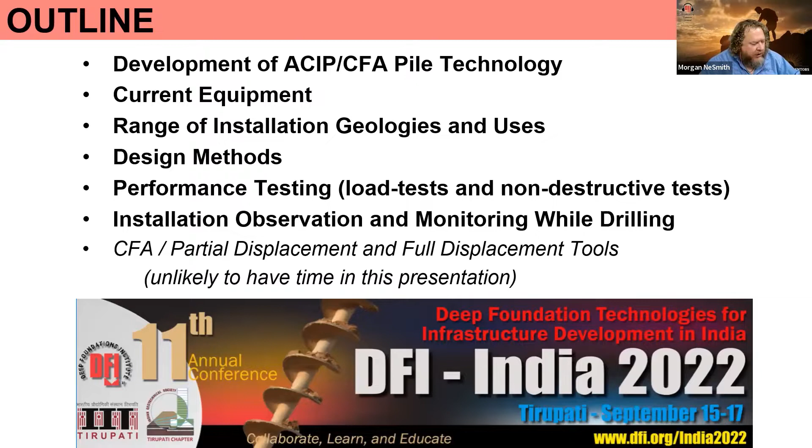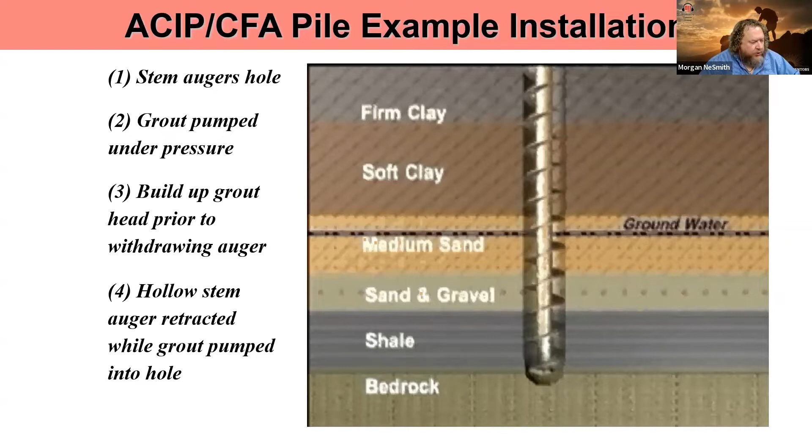So the basics of either the auger cast or CFA pile: we have a stem that has a fully flighted auger, and it augers the hole, creating a hole and excavating that soil to the ground surface. Grout or concrete is then pumped, usually under pressure, to the bottom of the hole through the hollow stem of the auger, and a head of grout or concrete is built up. We continue placing that concrete or grout as we withdraw the tool from the hole, leaving the concrete or grout pile.

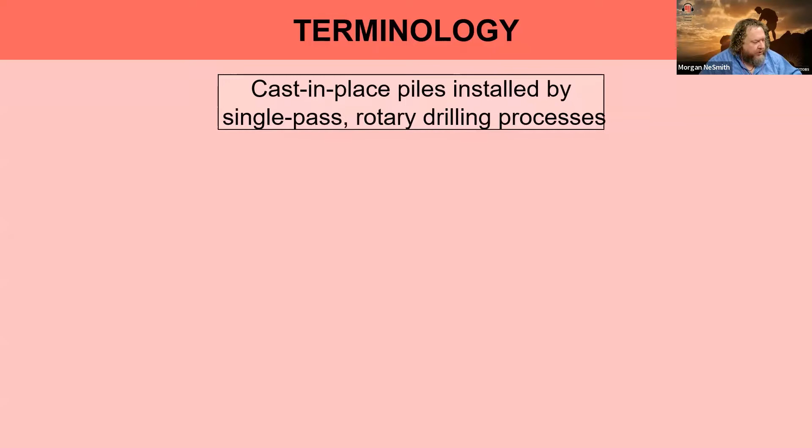So the terminology we talked about, all of these are cast in place piles. They're also all what we call single pass systems. That means we drill down one time and withdraw the tool one time. That's a little bit different from, say, a drilled shaft or a caisson, where you may auger a bit of the hole, take out the material, put some casing in, and continue on, having to auger and withdraw the tool multiple times. These are all also rotary processes, so we're rotating a tool into the ground.

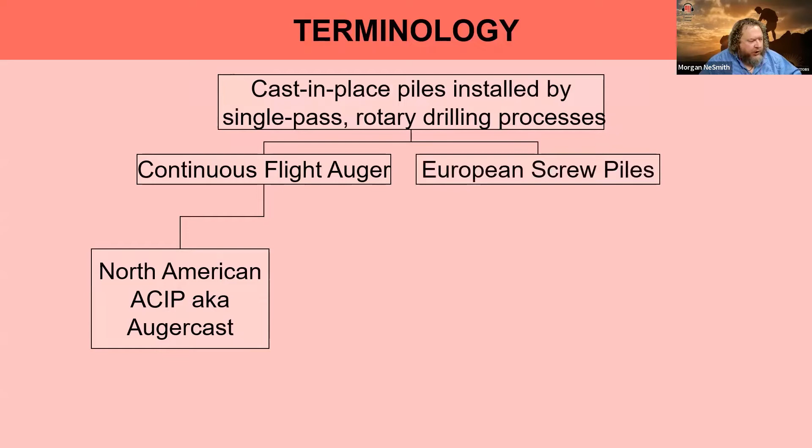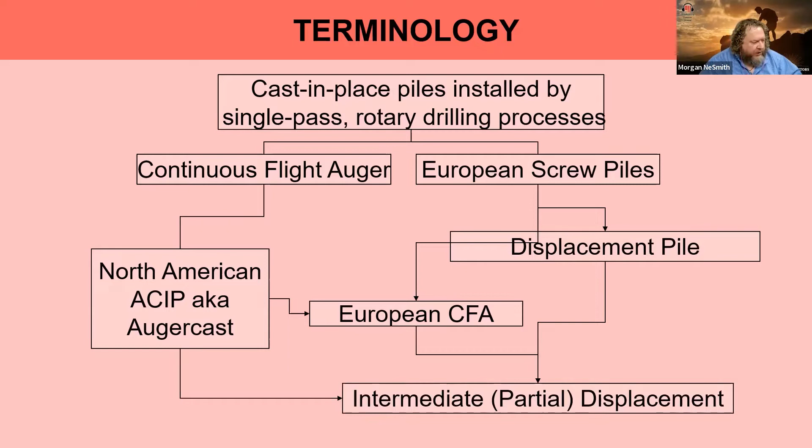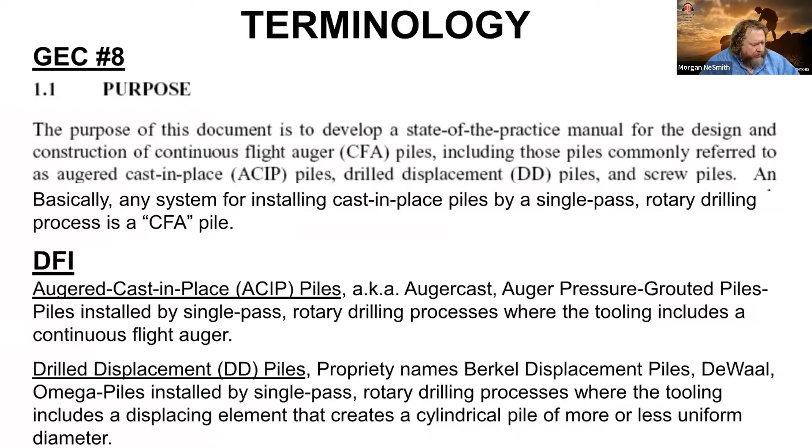We do use the term CFA because both of these tools use a continuous flight auger. In North America, we generally have called these piles auger cast in place or auger cast. When they were developed in Europe, they were using some different types of piles, with hydraulic rigs that I think you're probably more familiar with in India. When they adopted that continuous flight auger technology, especially in the United Kingdom, they referred to these piles as CFA. That's kind of where the two terminologies developed from, in the 1950s and 1960s. There are a couple of other related types of piles, but we're not going to get into those today. From North America, at least within DFI in the industry, we generally refer to these as augered cast in place piles, but we also use the term CFA. I'll talk a little bit about when we use the two different terms.

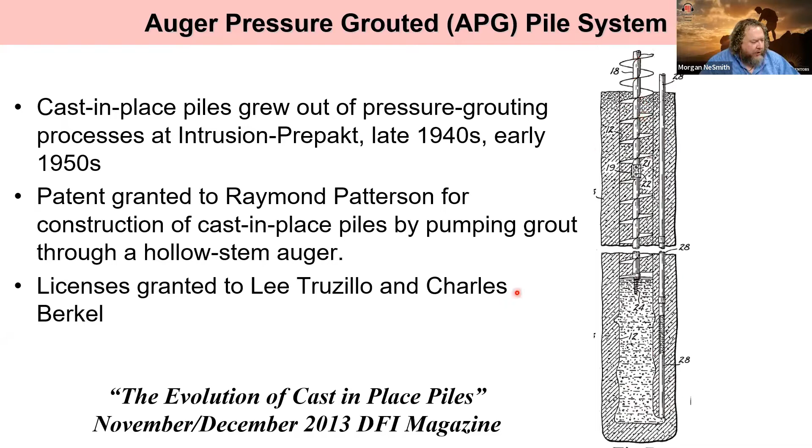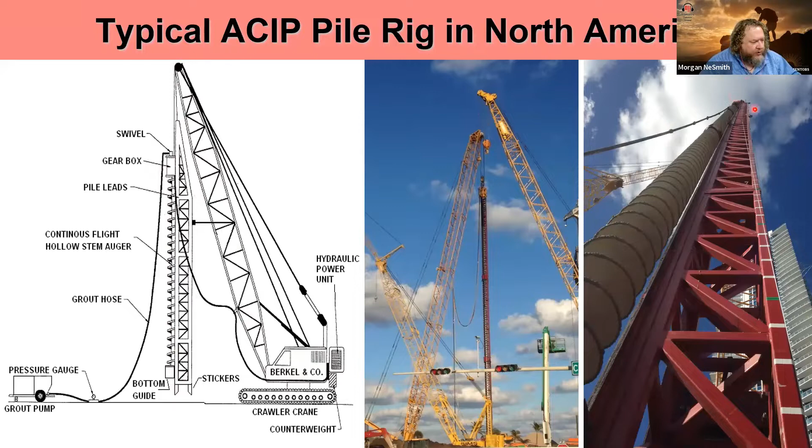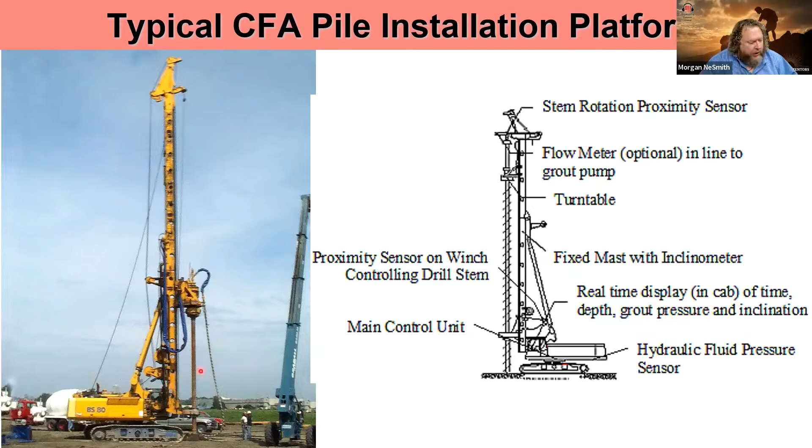What we started calling CFA, or what the UK has always referred to as CFA, is the same technology, but installed with what we call a fixed mast or hydraulic rig. These are dedicated drilling rigs, and you can use them for different pile types, but they're very common for CFA piles. Here, instead of the mast being suspended from a crane, it's rigidly attached to the body of the installation platform, and the rotary gearbox travels up and down the mast similarly. So they're very similar processes, but it's a difference in installation platform, where we use the term CFA for these hydraulic dedicated drilling rigs, and we use the term auger cast pile, or ACIP pile, for the crane supported systems.

One of the flexibilities is you can design these augers with a range of angles and distances between auger flights. So generally there's about 75 or 76 millimeters inside diameter. That increases a lot of times with large diameter CFA piles to allow more grout or concrete to be placed, depending on the size of the pile. Overall, auger diameters for the crane mounted systems range from relatively small, about 300 millimeters, up to over 1200 millimeters. There is at least a rig or piece of equipment claiming they can go up to 1500 millimeters diameter for CFA. But as far as I know, in North America, we've only installed up to 1220 millimeters, even with CFA, so roughly about 4 feet is our limit.

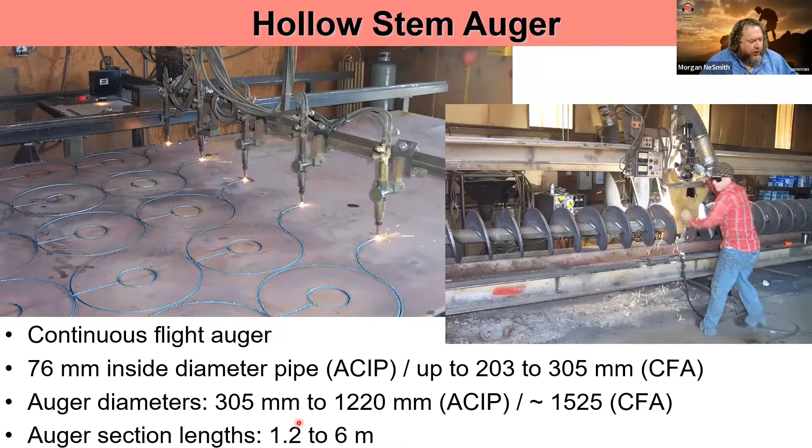We also can have a range of auger section lengths depending on how deep you're drilling. If you're drilling in areas with limited access, you can use shorter section lengths, but you can also use longer section lengths to drill very deep depths.

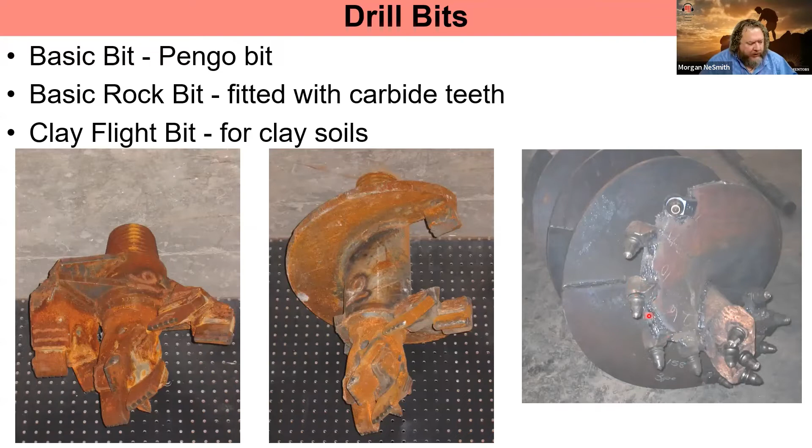We have a range of drill bits that we can apply. We have our very basic bit here, and then a basic rock bit, which has teeth, as opposed to scoopers for basic sandy soils. We also have clay bits for clayey soils to help excavate those as well. You can see the difference between the flat blade and the pointed teeth, which we generally use for sedimentary rocks, shale, claystone, sandstone. Anything harder than that, like limestone or granite, we're not going to be able to penetrate typically, even with these rock bits.

For the crane mounted system, again, we have a set of swinging leads supported from the crane, and we have to resist the torque generated by the rotation of the tool at the top. That's either done with a torque arm from the swinging leads back to the boom of the crane, or, very often these days for safety reasons, to the body of the crane, so that we're not structurally doing anything with the boom. With the fixed mast platforms, you generally don't need that, because all of the resistance is provided by the rigid attachment of the rotating tool to the body of the drilling platform.

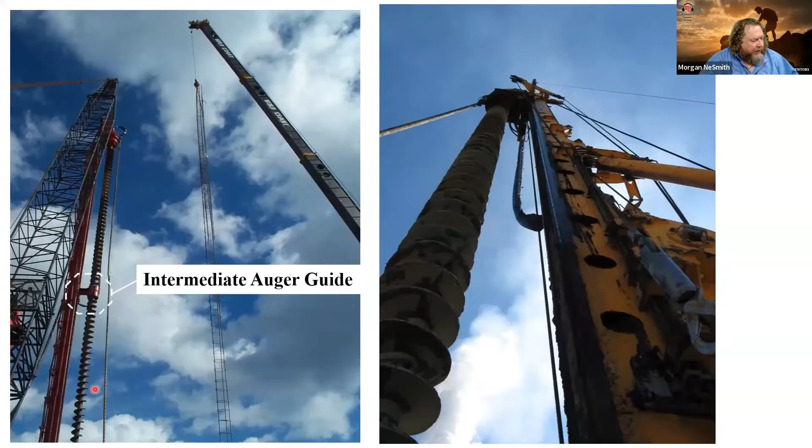As we drill longer and longer lengths, we can have a problem with bending or buckling of slender tools if the auger is too long. So we use intermediate auger guides, generally anything over about 13 to 15 meters in length.

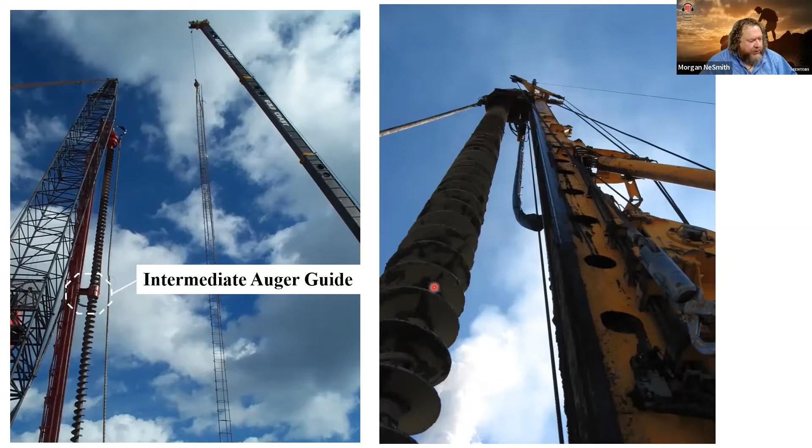When we're drilling any deeper than that, we'll generally start to use one or more auger guides. We often don't use those with the CFA rigs because they are rigidly attached and have slightly stiffer tools due to the higher torque provided by these rigs, with less chance for buckling.

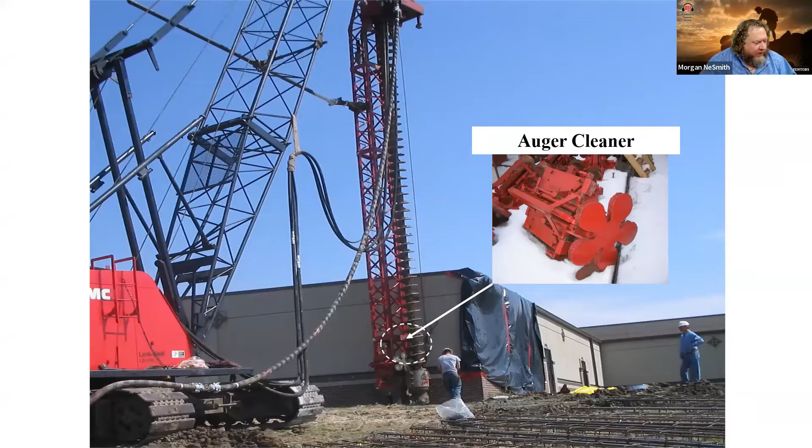One of the safety features we always try to incorporate is an auger cleaner, for either CFA or auger cast systems. That's to clean the soil off the auger flights as the tool comes out of the ground. We don't want that to fly up and fall, potentially hurting someone. It sounds funny, it's just soil, but falling from a relatively high distance it can do some damage if it hits you. So we try to prevent that by cleaning the soils off the auger flights as we withdraw them.

Our gearboxes are fairly similar whether rigidly attached to the CFA rig or to the swinging leads for the auger cast pile. Those are all hydraulically operated typically, and that's what travels up and down the leads. The tool itself isn't actually attached to the leads, it's attached to this gearbox, and the gearbox is what travels up and down the leads.

Torques generally range from relatively low for small diameter piles to, now, relatively high torques that let us use larger diameters, where we're starting to see these piles replace smaller drilled shafts in a lot of North America.

For crowd, that's the downward force we're able to put on the tooling itself. For crane mounted systems, that's the weight of the tool—the weight of the gearbox and the auger—which can be anywhere from about 10 to 45 kilonewtons, depending on the size and diameter of the tool.

With the CFA rigs, because they're rigidly attached, we have additional crowd force that can be applied directly from the machine to the tooling, besides just the weight of the tooling.

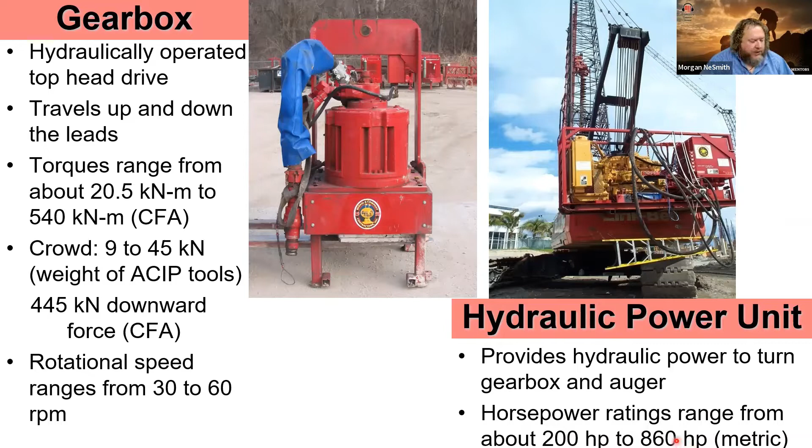With either system, we generally use grout or concrete, delivered either batched on site or, most often in North America, delivered by a ready mix concrete truck, batched at a plant and delivered to the site.

It's poured into the hopper here, and this is a hydraulically operated pump that pumps under pressure at about 2400 kPa at the outlet.

Now, I do want to say that we're not really pressure grouting with this system. This high pressure we're generating is really to overcome these very long grout hoses. We pump the grout or concrete for long distances, and then to get it up to the top of the tooling to go down the hollow stem, we need a lot of pressure. So I don't want to cause confusion and say these piles are pumped under pressure when they're in the ground, but we do pump them under high pressures to move them over very long distances to wherever the crane may be.

What that allows us to do is keep this pump in one place that's very accessible for the trucks bringing grout to the site, and then move the rig around without having to relocate this grout pump whenever we change piles.

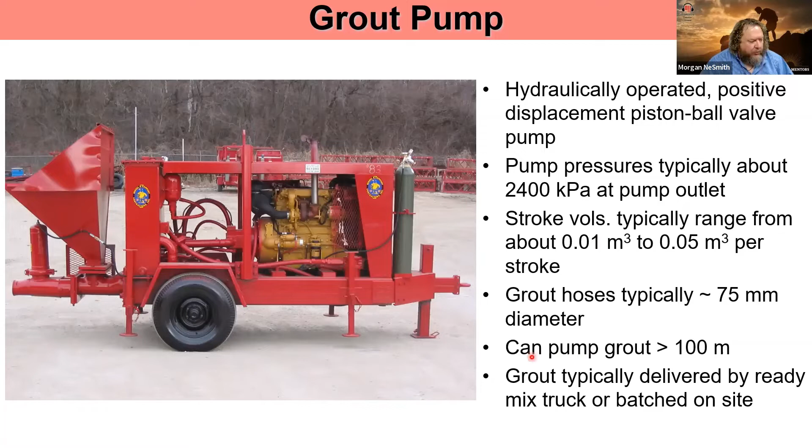This has been a developing technology in the US for about 50, actually 60 years. I'd say it's relatively mature across most of the country, and we have some major facilities supported on AugerCast or CFA piles here in the US.

I happen to live in Atlanta, Georgia, and the world's busiest airport is here - Hartsfield International. You can see the AugerCast piles supporting one of the columns in Concourse E, which was the old international concourse at this airport.

A stadium that was built in 2017 here in Atlanta is also supported on AugerCast piles, ranging from about 12 to 13 meters deep on the north side of the site to well over 30 meters deep on the south. They were all drilled down to bedrock refusal, and that bedrock sloped from about 13 to 30 meters from north to south.

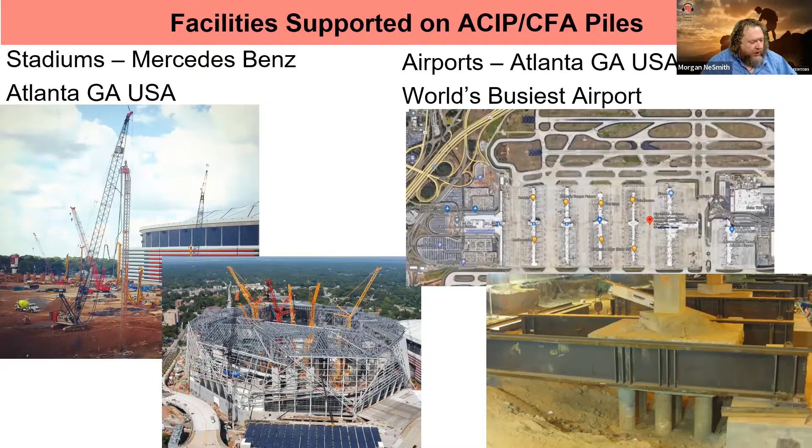That's one of the advantages of the system - we can tailor the length of the pile to meet variable conditions on the job site relatively easily. We can also put in very long piles.

This was with a crane mounted system, and these piles were probably about 40 to 45 meters deep. They were relatively large diameter piles that replaced the original drilled shafts intended for the project - this is one of the longer piles that's been installed in the United States.

That's something we can do with crane mounted systems. One of the things with hydraulic rig systems - even the largest drill rigs available - is they have a somewhat more limited stroke, about 40 meters total drill length.

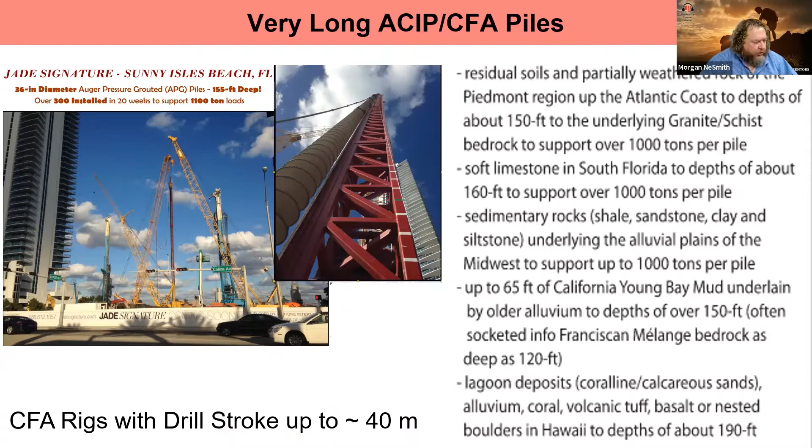As far as the range of geologies, one of the great things about the system is it's very flexible in terms of the geologies we can put these piles in. This is a project in the northeastern United States, right next to a river, where we see a sandy crust in the upper 3 meters or so, then about 15 meters of very soft alluvial deposits, and a little bit of sand overlying the underlying bedrock.

We installed AugerCast piles here and pumped. The important thing is to continue pulling the tool at a steady rate and not resist the temptation to pump too much grout in this very soft soil - continue pumping steadily and pulling steadily to the top of the hole. We find we can very successfully pump AugerCast or CFA piles in this geology.

Conversely, here in Atlanta, we have residual soils from an underlying granite that can be at the ground surface, or 150 or more feet deep. Generally we have residual soils that get denser with depth, and then locally what we refer to as partially weathered rock.

It's what we call an intermediate geomaterial - it's weathered from the underlying bedrock, but it is drillable, and it's very stiff, giving very high shaft resistances for our piles. Then we have the underlying bedrock. So in a boring or stratigraphy like this, we would drill through the residual soil, and even through all of this partially weathered rock, down to the underlying bedrock.

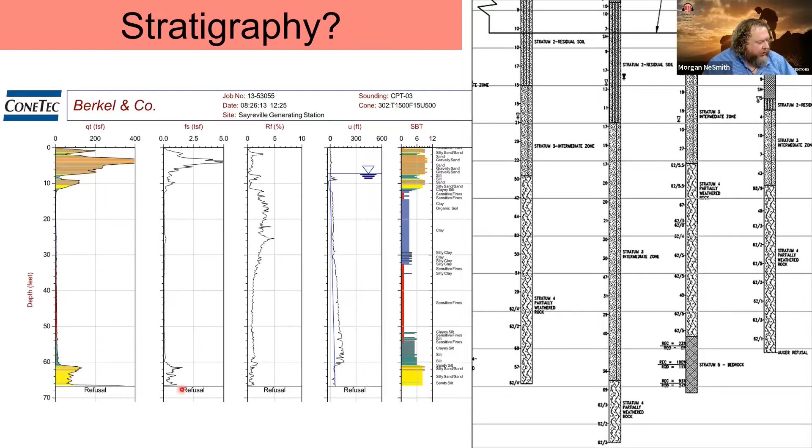That's allowed us to really maximize the loads we can put on these piles. We're really looking at structural limits of the concrete or grout we're using, as opposed to geotechnical limits, because of the stratigraphy we're installing in. So we can install these piles in very dense strata, even some sedimentary rocks like sandstones and shales, but we can also install them in some very soft stratigraphies.

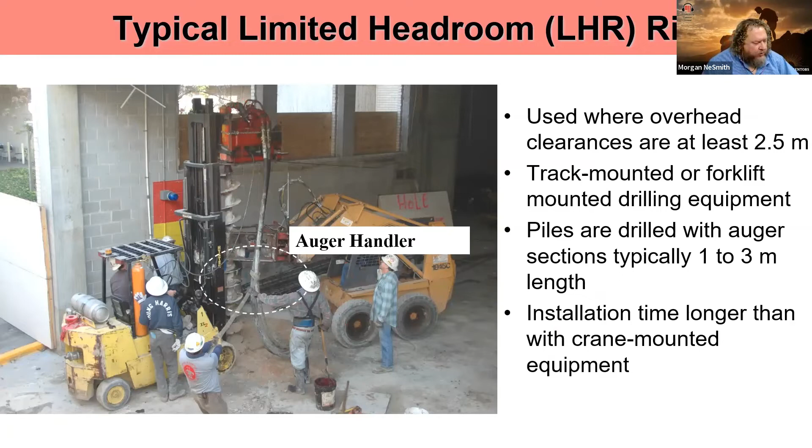This is probably for future development, but one of the other flexibilities of the system is you can use them similarly to a micropile. Where you have limited access, there are pieces of equipment we can use to install smaller CFA piles - dedicated smaller equipment where we drill one section of auger down at a time, disconnect, and use something like an auger handler to place another piece of auger. So it's still one drill down and one withdrawal, but done in sections - a bit slower, but it gives flexibility in areas with existing buildings or limited access.

These are typical design limits, and in the US we use the International Building Code - I think we're the only ones who use it, but that's okay. We're limited to 30% of the unconfined compressive strength of the grout or concrete that makes the pile. So for example, on the lower side of what we have available in the US for grout or concrete, we might have design loads in this range for certain diameters, and that might be for soil - we'd be limited by the geotechnical capacity of the pile and soil, so we might not worry too much about the structural capacity of the pile.

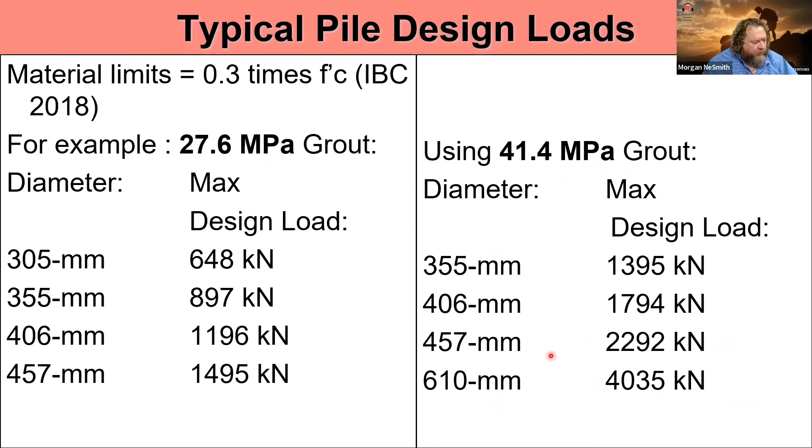However, in situations like partially weathered rock or drilling down to bedrock, we can use higher strength grout, and for some of those same diameters or even larger diameters, put much higher loads on the same diameter pile by using higher grout strength. So as standards in India develop, what sort of grout or concrete strengths are available will be one of the limits to keep in mind in terms of the loads per pile you install.

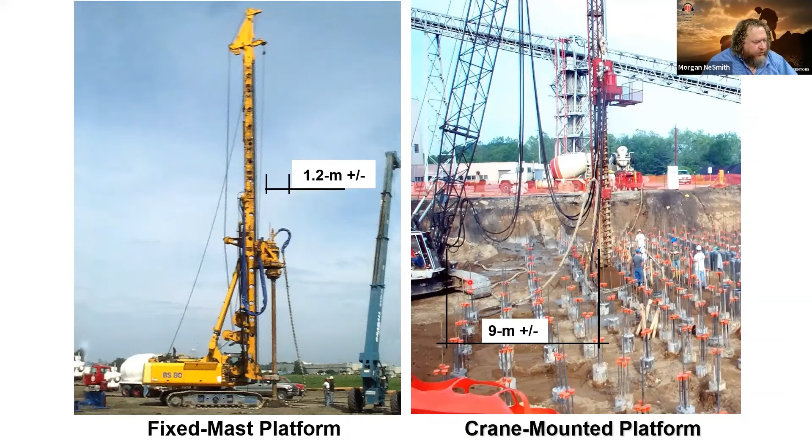The last difference in the system - one reason we use crane mounted systems is we don't have a lot of fixed mast platforms in the United States, relatively speaking. There are a good number, but these really only started to appear in the US in the 1990s and early 2000s. Some drill shaft contractors have some, but they're not quite set up to be flexible enough to use CFA technology. So that's one reason crane mounted systems are popular - we have an abundance of crawler cranes, and there's flexibility where we can sit the crane in one spot and move the tool as needed.

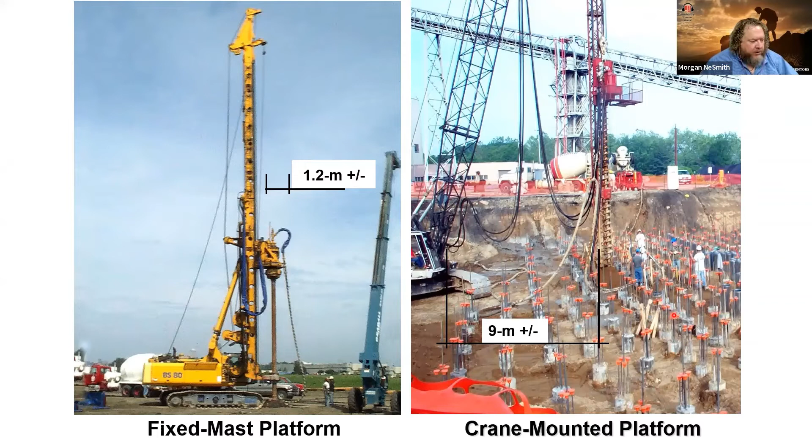One thing Sunil and I were talking about before we started was that there really are an abundance of hydraulic driven rigs in India. That's one reason we're starting to see these hydraulic rigs used more and more in the US, particularly as we use larger diameter CFA piles to replace drilled shafts. But when we use these, we have to remember we have to drive up to every pile location - it doesn't have quite the same flexibility. It's something to keep in mind when sequencing the installation, that we may need to start from one side of the site and work across, because we won't be able to reach back into already constructed piles to put another pile in if needed.

With either pile type, the materials are basically the same. We're using ready mix grout or concrete - that's typically cement, fly ash, but fly ash I think in the future is going to be used less and less for environmental reasons. For grout we generally use just sand, but for concrete we'll use sand and gravel, and then water. There are a variety of aids we can put in the pile to keep it in a fluid state so we can pump it.

Or do things like keep the water retention rate to a more appropriate level so we can put reinforcing steel in the pile after we pump it. So we have a lot of additives we use these days to keep, without reducing the grout strength, the grout or concrete in a fluid state so that, again, we can place it and put reinforcing steel in.

Generally we use cubes for grout when testing the unconfined compressive strength, and we use cylinders for concrete because of the aggregate size. One thing to remember is when looking at unconfined compressive strength, if we test on cylinders - which generally have a length of 2 times the cylinder diameter - you're going to get lower results than with cubes. So make sure when specifying a certain strength, you know how it's being tested and adjust. If you want a certain strength referencing a grout cube spec but you're actually using concrete, make sure you reduce your requirement, because you're only going to get about 85% of the unconfined compressive strength by testing a cylinder.

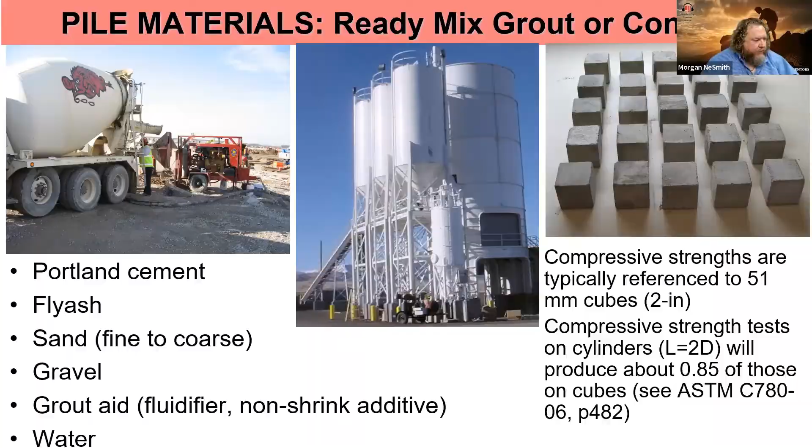One of the reasons we use that fluid grout - it's not really under high pressure, but there is some pressure as we build that grout pile, a head of pressure like any fluid column. The longer or taller that column is, there's some pressure that can help expand the soil a little bit. But one of the best benefits is that fluid grout and concrete, once under column pressure, can really expand and fill in any of the small crevices created in the side of the hole. It won't be perfectly smooth, which is actually very good because it creates a very high shaft resistance with that grout or concrete to soil bond.

But because it's heavier than generally the soil, or either the hydrostatic or effective vertical stress, that concrete or grout column stays stable. That's why we don't have to use any casing, and we're able to drill one time down, pump the grout or concrete column, and just leave it. It will stay open to allow it to cure or for us to put reinforcing steel in.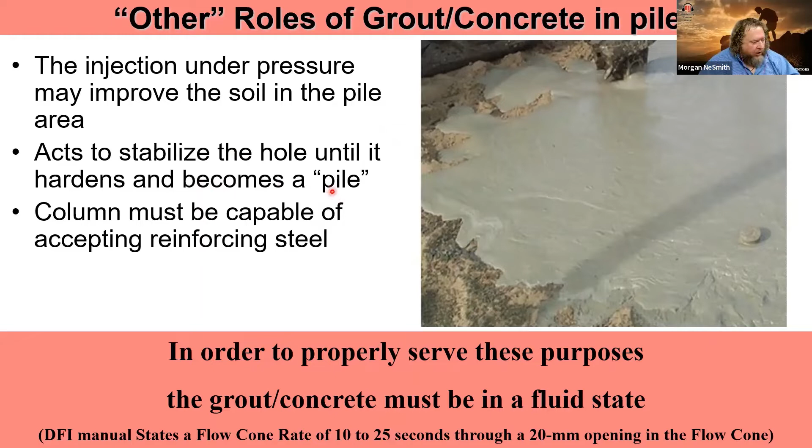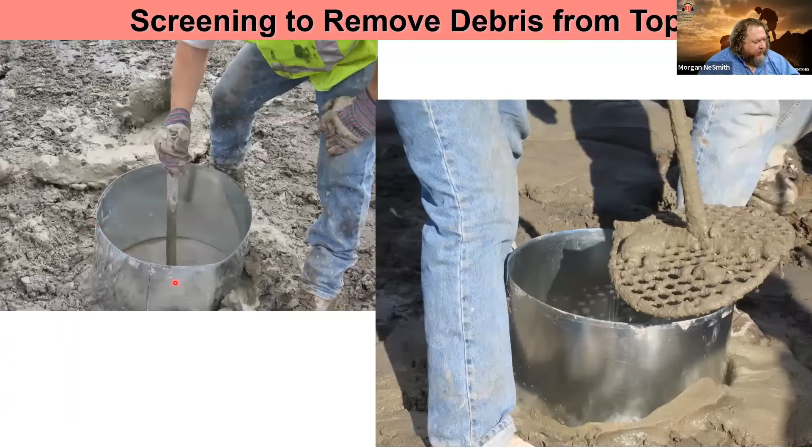This is an example of once we've pumped the pile and removed the tool, we do a little bit of cleaning at the ground surface - this is manual cleaning of the top of the pile. Then we generally put in something to protect the top of the pile. This particular tool has a hinge so that when you dip it down, it folds up and goes through the grout, and when you pull it back out of the ground, these flaps come open and trap any soil inclusions right at the top of the pile. That's generally how we construct the top of the pile.

Where we construct the top of the pile can be a little tricky with this fluid grout. Since it's in a fluid state, we generally don't use particularly deep cans. So if you're working from a particular ground surface and your top of pile is very deep below - there's going to be an excavation, for example, for a basement - you may end up wanting to place the top of the pile at about the existing ground surface, and then that pile will have to be cut down as that excavation commences.

One of the reasons is, particularly in areas with a high water table, the more you dip that grout column down, the more we're taking away some of that fluid pressure that stabilizes the hole. Especially with a high groundwater table, it can want to come under that stabilizing can at the ground surface and bring soil inclusions into the top of the pile, and we want to avoid that. So oftentimes, even though it's a little more trouble in the final construction, we want to leave the piles higher than they need to be and let them set, then chip them down during the final excavation.

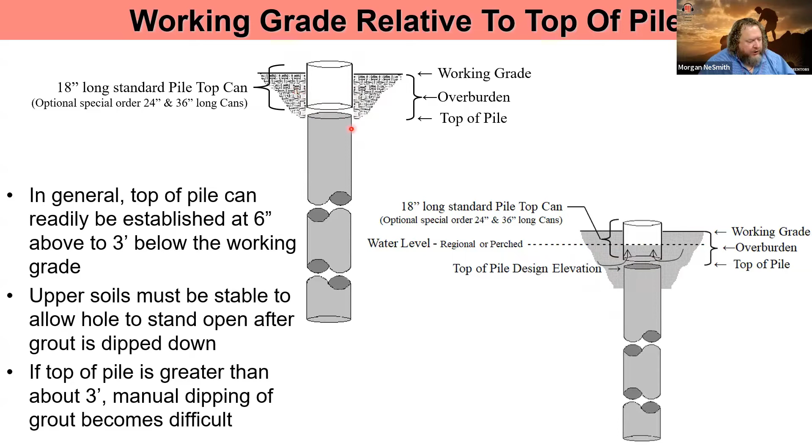We have a range of reinforcement that we can put in. Center bars are typically used for tension resistance, at least in North America. We only use cages when we have lateral loads that need to be resisted, because grout is great in compression but not so great in flex. So we want to give it some additional flexural strength with cages.

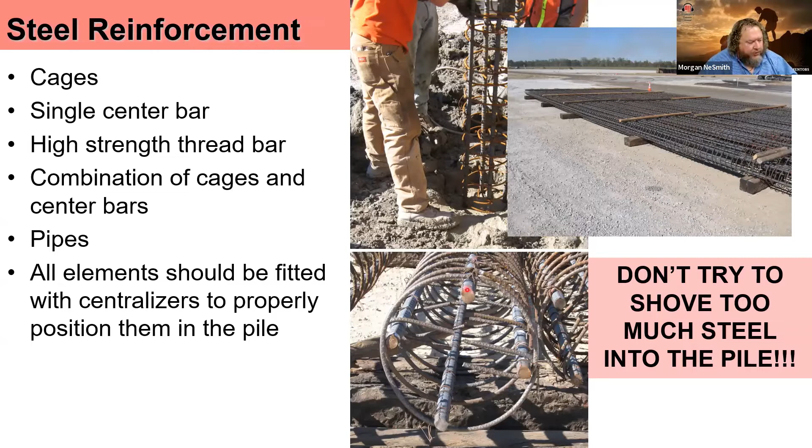We can put combinations in. If we have very high lateral loads, we can even put steel pipes in, and we have a variety of centralizers that we can put on the piles. One thing I always try to tell designers is we don't want to try to shove too much steel into the pile - that becomes a little difficult, even with fluid concrete or grout. So it's often better to use a slightly larger pile to accommodate steel than to try to put a really high amount of steel in if you have very high lateral or seismic loads.

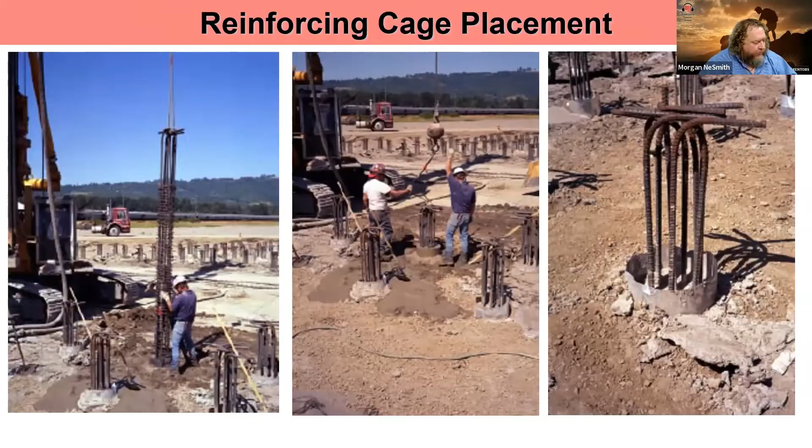This is just an example of the steel being lowered into the fluid grout column once it's been placed, and then the steel sticking up out of the fluid grout column. And this is an example of the centralizers.

We have what we call flywheels that we can put on cages, or also sleds, to keep the cages centralized. We have similar things that we can put on the center bars, centralizers, or as we often call them, footballs—American football, not international, just because of the oval shape—the little attachment to keep it centered in the pile.

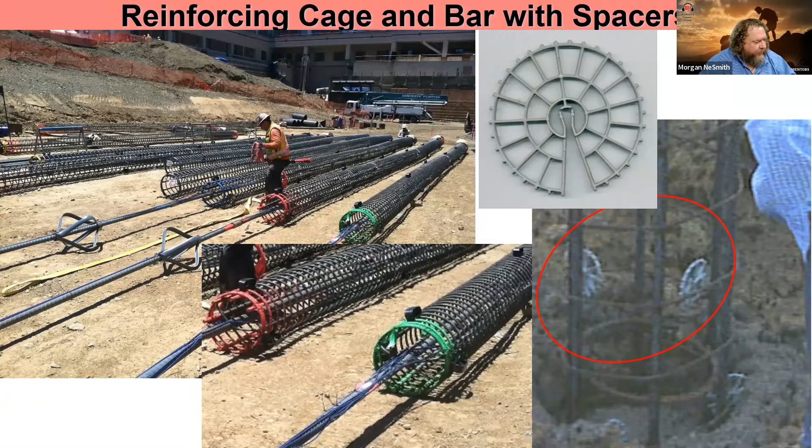So capacity, or how are we going to design the piles? For fine grained soils, the general rough method is the alpha method, which is an undrained shear strength method of designing shaft resistance and toe resistance. So from a design standpoint, we're either looking for undrained shear strength, or there are methods that have correlated cone tip resistance values directly, instead of having to go from QC to shear strength and then to capacity.

Indirect correlations—if you can't measure the shear strength directly, you can estimate from SPT values in clays, Atterberg limits, and there are also pressure meter and dilatometer tests that you can get undrained shear strength from as well.

The basics are, I think most of you are aware of this, it's similar for almost any pile design. The shaft resistance is equal to some alpha value times that undrained shear strength. And the toe resistance is that undrained shear strength, again, times some bearing capacity factor.

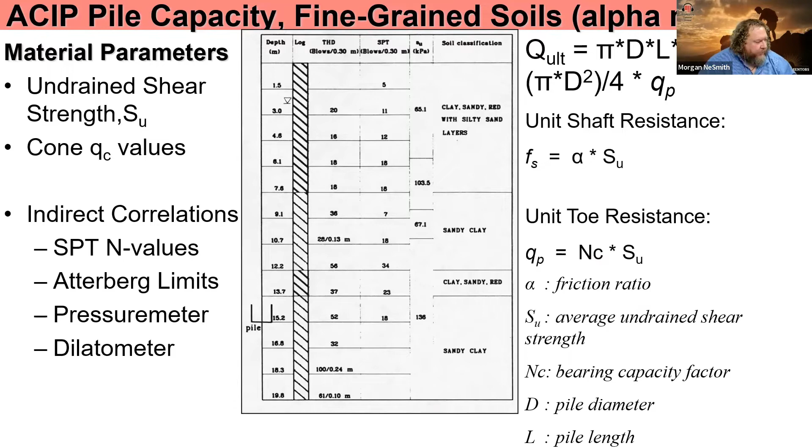The primary recommended method in the US or North America was from the Federal Highway Administration, but this is the same method. It uses the same alpha factors for CFA piles as it does for drilled shafts.

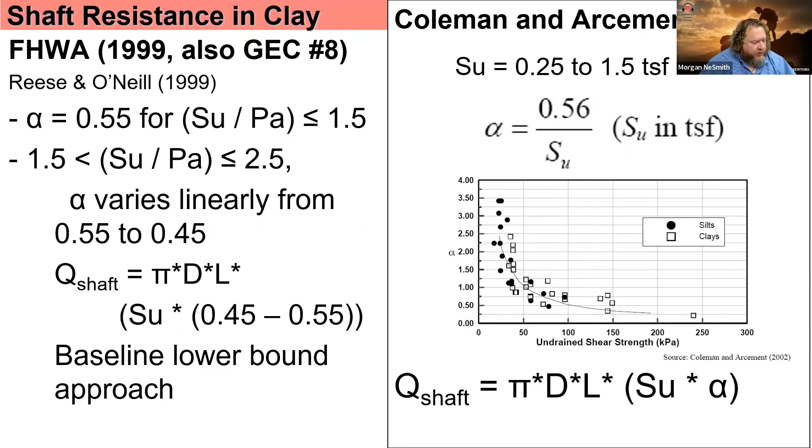It's pretty good, but what I have found is there is a newer method from Coleman and Arcement. These alpha values were directly developed from augercast and CFA piles. So this relationship with alpha gives you slightly higher alpha values, and that's, I find, to be more realistic than these drilled shaft alpha values, because we do find that we get higher shaft resistance from augercast and CFA piles than we do with drilled shafts.

One other thing about shaft resistance is we have some various materials in the US that just behave a little bit differently. And that's what I would encourage you as a society, and in the Indian Geotechnical Society and the DFI India, to think about—as you start installing these piles in various geologies, maybe look at local differences. That's what I've seen over the last 20 years: there are really some variations over the United States in different areas where, for example, in Texas, we have over consolidated clays from desiccation where the water table has risen and lowered repeatedly over thousands and thousands, millions of years.

We generally use a very, very high alpha factor there, higher than either Coleman and Arcement or the FHWA method would tell us. So I know if I'm doing piles in certain parts of Texas that I want to use a much higher alpha factor. That's one of those things I would encourage y'all to pay attention to, and develop maybe some local variations to overall standards.

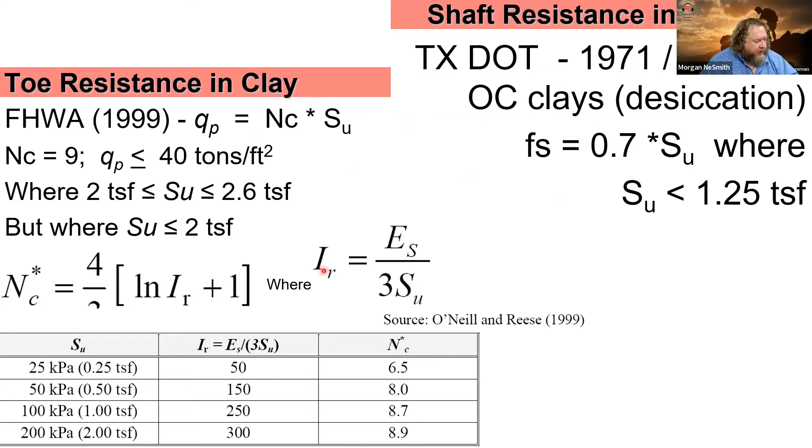The toe resistance in fine grained materials, again, is fairly straightforward—it's just your typical bearing capacity factor. I find for most piles that are in clay, this is fine. We generally get a combination of friction and toe resistance in these piles, but by and large, the shaft resistance plays a much larger role than the ultimate toe resistance, unless you're in a very, very hard, heavily over consolidated clay, like some of these Texas clays. So I think this gets you close enough to the toe resistance that you're actually going to see in the field.

Again, how do we get shear strength? Hopefully we can measure it directly. In situ is my favorite. If we have to do it in the laboratory, that's fine—we just need to be a little bit careful.

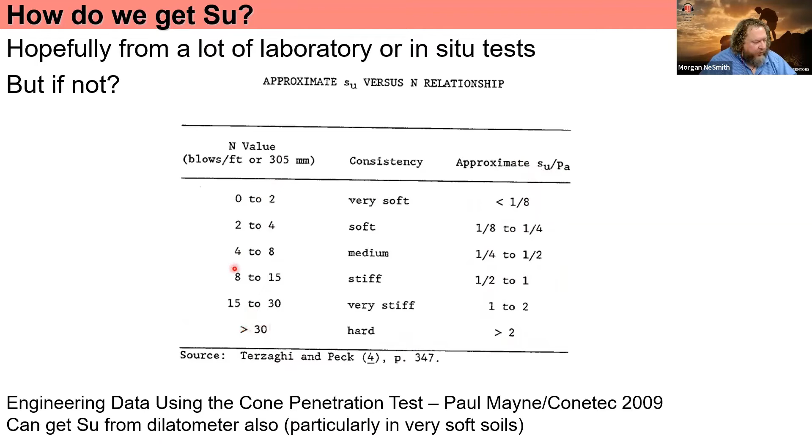We get in the US, and I'm sure around the world, a lot of standard penetration test results. They're not great for correlation, but if you have a lot of them, you could probably get a general idea of the shear strength profile. You just may need to be a little bit conservative in your design methodology, because those SPT values are so related to the operator and how the tests are run—they're very, very operator dependent. So we need to be a little bit careful in using those values.

Again, I mentioned a direct CPT method, and I actually like to use this method when we can perform CPTs in certain geologies. This is either called the LPC or LCPC method. It was originally developed in 1982, but it's been updated for a range of pile types.

So for CFA piles in particular, there is a maximum side shear, but it's a direct correlation between tip resistance QC and the side shear. And then there is also a direct correlation between the toe resistance of the pile and the tip resistance from the cone penetration test.

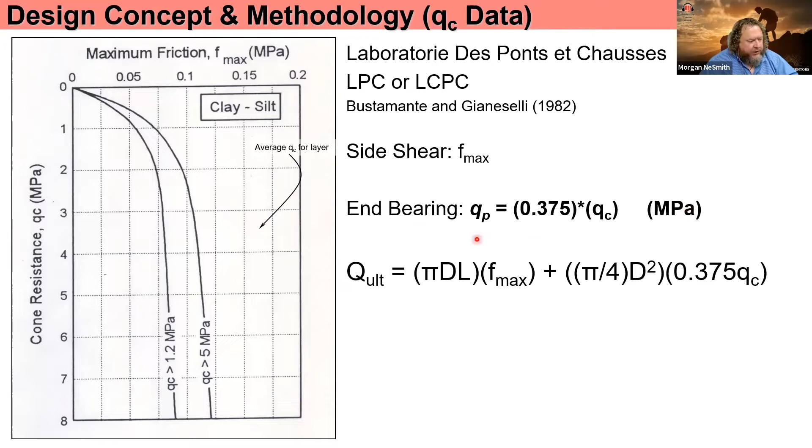So it's a very easy method to apply if you do have CPT results. I find that it's just a little bit conservative, although it's gotten better as it's been modified over the years. One reason is that when correlating some of the old load tests, maybe we didn't always test piles to failure. Sometimes they were just tested to twice the design load, and that was called the ultimate load, whether the pile actually failed or not. So I think our database has improved over the last couple of decades, and that has improved this direct correlation method as well.

So in sands, the big difference is we generally use drained design methods or beta methods, or again, we can have some direct relationships with cone penetration tests.

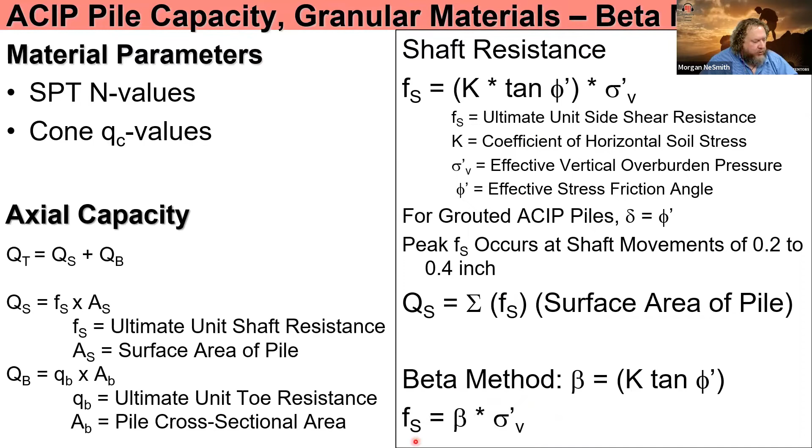So in general, this is the same equation you're going to see for any typical shaft resistance for piles. You're just going to vary some of these parameters depending on pile type. In this case, we're coming up with a value beta times the effective vertical stress to come up with shaft resistance. The most basic but generally recognized method to get you started, but I think it's very conservative, is the federal highway method that gives you a range of beta values directly related to depth.

And then there have been a couple of other databases developed in the last 20 years or so that can give you different methods or different values for beta that might be more applicable. What I find, I think I would encourage the collection of data and maybe the development, starting with these existing databases, but maybe developing your own local databases, because I do think these are all pretty good, but depending on where you are, this, I believe, is always going to be somewhat conservative, and it's going to depend on where you are geologically and how those sands are. Are they alluvial? Are they coastal? To which method is going to give you the best answer?

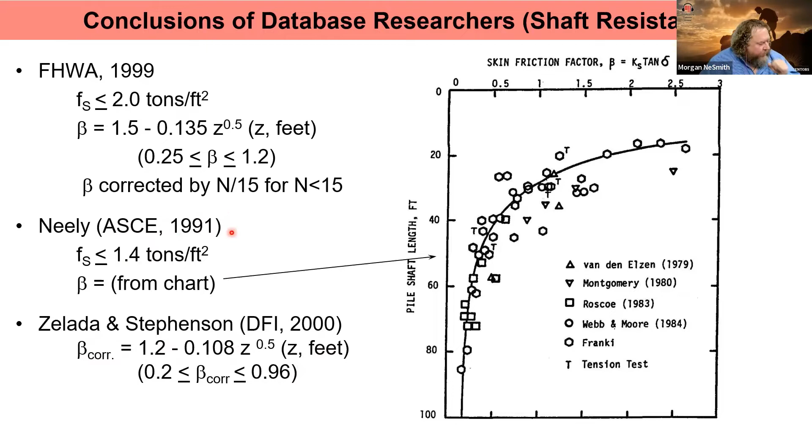They will all get you pretty close, and you know, you're going to run a load test typically to verify the capacity, but I really would encourage you to collect data on your own and develop local standards.

Coleman and Arcement have also developed beta values that are actually pretty good, again, developed directly from CFA piles. And those are a little bit better than the FHWA method beta values, since those were developed for drilled shafts and then applied to CFA piles.

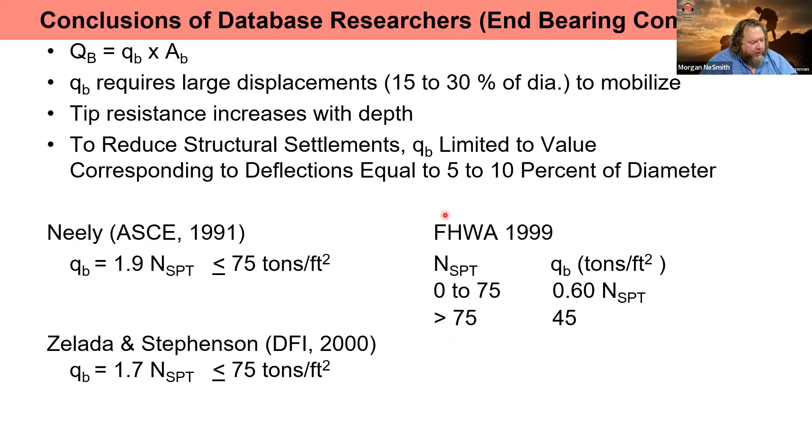And again, generally from the end-bearing component, there is general agreement that you can directly from the N values from an SPT get toe resistances, and that works reasonably well. They all sort of tend to end up at about the same place. So generally using the FHWA, for toe resistance in sand. If you're in a very sandy soil, by far, the pile resistance is going to be mostly in the shaft anyway. So I think this will get you a good enough estimation of toe resistance for design.

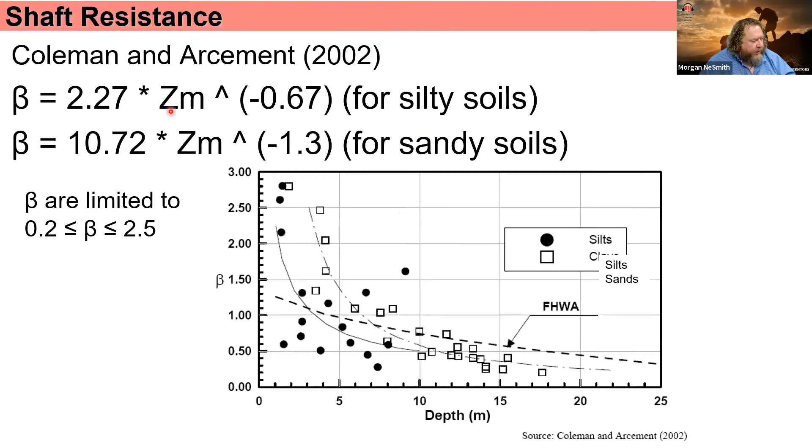However, in particular for sandy soils, I find that the direct method is very, very useful. The LCPC method, using tip resistance directly to get both side shear and toe resistance. We get some of our best estimations of capacity from CPT values directly. And in fact, I have internally within Berkel even gone so far as to taking our SPTs when that's all we have and correlating that to estimated CPTs just so I can use this method as a check. So I'm starting to use CPT values directly as opposed to going to some beta value for side shear. It's these direct methods for sands I find to be very, very accurate in terms of their estimation of capacity.

One of the other items that you're going to want to pay attention to the more you start to use these piles, though, are local conditions.

So in the southeastern United States, for example, we have limestone, and technically, yes, it is a limestone, but it's not a very hard limestone. It's a calcareous limestone, really a hard cemented sand. So it's not like a dolomite or a basalt. It's not that hard, it's very drillable. And for those geomaterials, they don't really behave like a sand or a clay.

So those design methodologies really don't apply. That's where if you find any sort of cemented or intermediate geomaterials that are stiffer than soils for whatever reason, whether heavily over-consolidated or lightly cemented, you're going to want to develop a local database, as they have here, for example, in these limestones we find in the coastal southeastern United States.

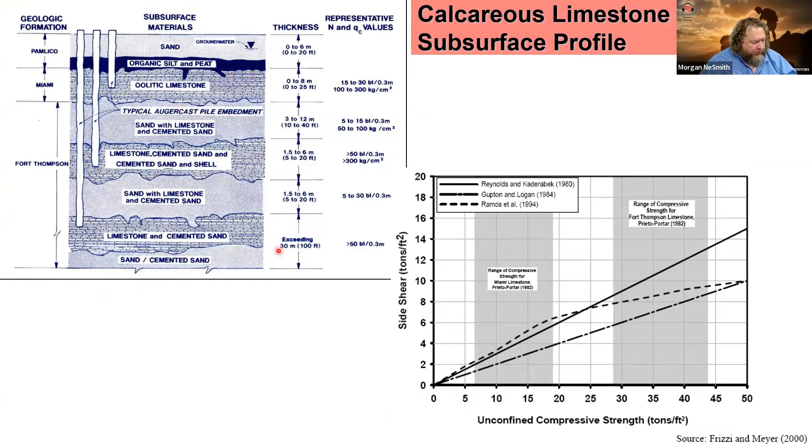One other thing I'll say, and I want to be careful with this, is if you use the Federal Highway Micropile Guidelines, there's a document available for free. And if we take a continuous flight auger, that's very similar to a type A micropile where the grout is just placed not under pressure, but under gravity.

So if you're looking at some rocks, especially soft shales, and you consider the design methods I gave for clays and sands in general, if you're drilling into softer rocks, you may want to look at these type A values for nominal, that is, ultimate bond strengths between the grout and the rock.

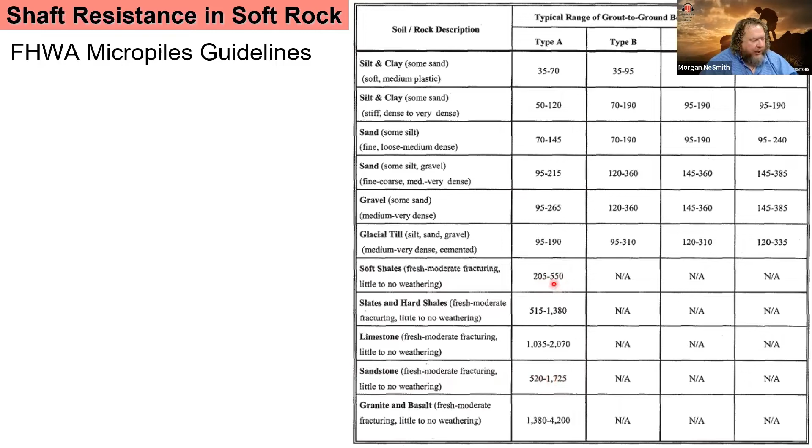I find it works pretty well for shales and sandstones when we drill into those types of materials. I generally start on the lower end of these values, but I'm finding more and more that when we're actually doing the load tests, we're getting closer to the mid-range to higher end of these values. I'd probably start a little conservatively when using them, but I think there's a lot of potential there for drilling these piles in soft rocks and getting high capacities.

All right, so load tests. How do we test the piles? The most common load test you're going to run is a compression test. We want to keep a building from sinking into the ground or collapsing entirely, so we want to make sure the piles can support the compression loads from the structure we're building.

We've decided as an industry in the US that there's not always a lot to be gained by running very long tests. What we like to do is run the quick test, which has a lot of loading points. So we're loading in very small increments, but at a relatively high rate, every 5 or 10 minutes increasing the load. That's now so common that it's Option A of this ASTM standard for compression loads.

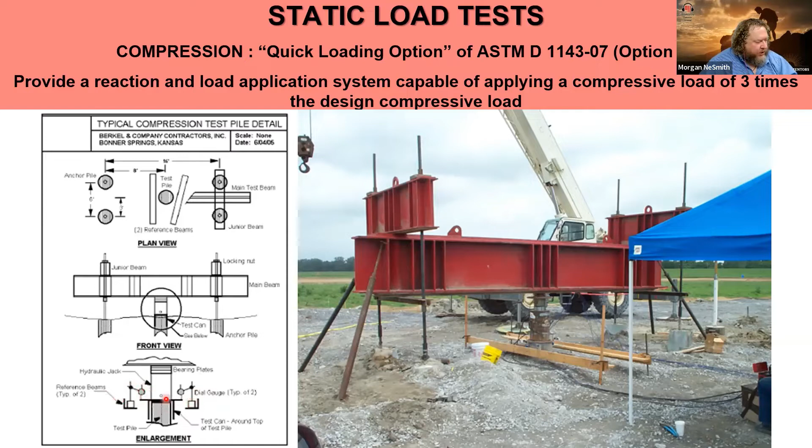The most common setup you're going to see uses either reaction piles, or very commonly a platform with a lot of weight, often precast concrete piles or other weight that supplies the load we can push off of to apply load to the test pile. We generally have a hydraulic jack and gauge and a load cell, and then dial gauges, and we'll apply load in increments and monitor the deflection of the pile head as we apply that load.

One thing I'd like to encourage is the use of strain gauges. We call these sister bar mounted strain gauges because the rebar can be attached directly to the center bar that's inserted into a test pile, and they're very robust. These are vibrating wire strain gauges that have wires coming up all the way out of the grouted pile, and you can place those at various lengths along your pile.

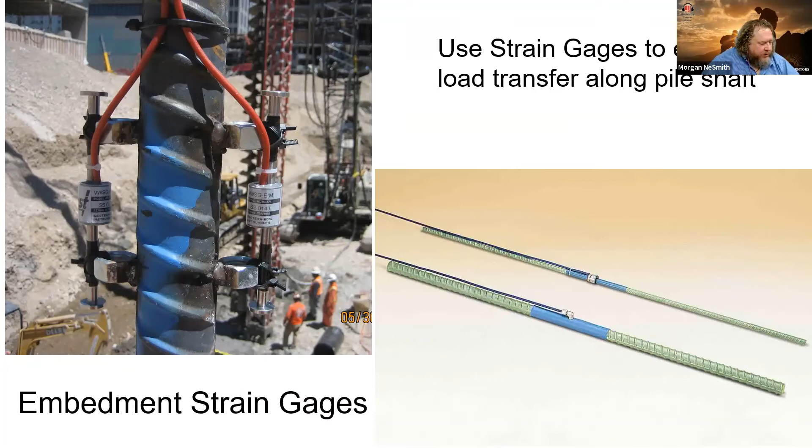There are other types of gauges that don't have the sister bar attachments, so they have to be more carefully mounted to the pile. But using strain gauges of some sort will allow you to really get a hold of the different shaft resistances in different layers along the pile, as opposed to just getting an overall view of the average shaft resistance of a very long pile.

So the other comments I'd like to make about load testing are, once we get a nice curve with a lot of load points, maybe using that quick compression test method, we do want to try to test to failure when possible.

We don't want to just stop, even though we use a factor of safety of 2 most often in the US when we do test piles. So let's say we test a pile and the design compression load is 100 tons. I think maybe 20 years ago we'd test to 200 tons, and that was it, that's all we would do. We are seeing as an industry more and more testing, really pushing those piles to an actual geotechnical failure if we can, or extrapolating the load displacement relationship so we can get a better estimation of the actual capacity of the pile, as opposed to just saying that's 2 times the design load, that's where we're going to stop and call that the capacity.

So if you get into methods of interpretation for ultimate load, and you look at the International Building Code, it provides 3 methods for interpreting ultimate load. The only thing I would say is this Davisson method was developed for precast concrete piles, and you really shouldn't use it without a modifier - I don't like to use it at all. There was a paper funded by the DFI specifically for auger cast piles that recommended using the Butler-Hoy method when you can get this type of extrapolation. But there are methods out there to make adjustments. Dr. Davisson, in a more recent paper, recommends a modified Davisson method, and at least that gets closer.

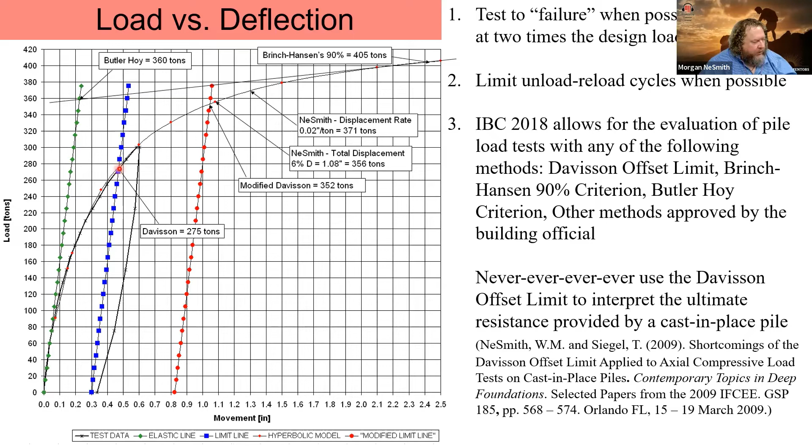That's using a modifier of 4 in this offset. So with the Davisson method offset, again there's the elastic line of the pile, and then there's some offset, but it's modifying and multiplying that offset by about 4 to use for CFA piles to get a better estimation of the ultimate load. And you can see here, we're getting about 350 tons and 360 tons, relatively close. Whereas if we just use the traditional Davisson method, we would not be allowing ourselves to use as much of the pile capacity as we actually have.

Some of the other tests that you may start to see more and more commonly - this is a dynamic load test. This is a test frame, this happens to be a steel pile, but you could do this on a CFA pile. There's a weight that's lifted up to a drop height and then dropped onto the pile. The pile is instrumented so it measures wave speed down the pile and back, and correlates that to pile resistance. This weight is then dropped from various heights, and that's what we see here - the resulting estimated load at each drop height. So it's not a case where you can directly measure capacity, it's a case where you run a series of tests and can interpret an estimated CFA pile capacity.

This was also developed for driven piles, and that makes a lot of sense, right? If you drive a pile and then come and drop a hammer on it, that's kind of the same method you were using to install the pile anyway. But that's not how we install CFA piles - those are drilled and grouted. So I find we have to be very careful using dynamic load tests in soil, but for CFA piles...

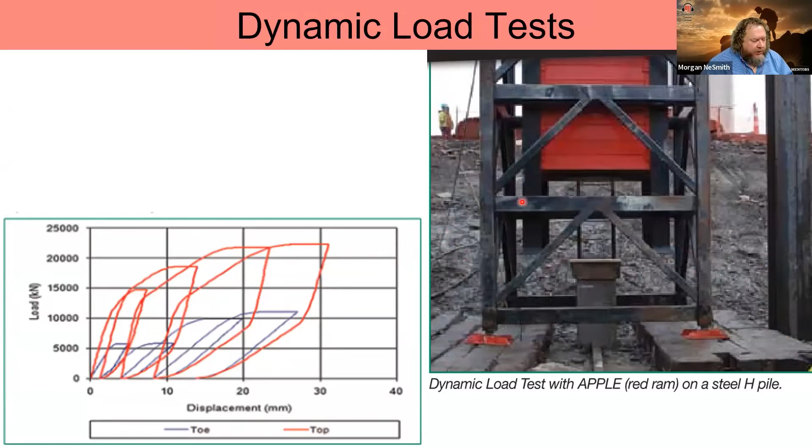But for piles that are installed to bedrock or refusal, they're very, very useful. The toe resistance we get with CFA piles on rock mobilizes almost immediately, so we do tend to get very good results with dynamic load tests, correlating them with static load tests. They're very useful when you have piles with shallow rock. Say you only have 13 or 14 meters of pile and a very high compression load on that pile - you may not be able to install reaction piles that can provide enough uplift, or it might not be affordable to bring in enough load to really test that pile with a static load test. That's where the dynamic test can be somewhat useful.

Another method that's very common around the world these days is the statnamic test, and that is not quite dynamic and not quite static. There is a reaction load in a frame that's brought in and set over the pile. There is a small explosion - don't be scared, it's very controlled, no problem - and then there's a dampening system, so the load is not immediately applied to the pile.

It's applied very quickly, but in a controlled manner based on that explosion and then the reaction of the mass that's inside the reaction system. So it happens very, very quickly, and it could be very economical for very large loads, to test very large loads on piles. But again, it's not direct, so there are some correlations you have to be careful of when you run the test and try to extract the actual static load that you're really looking for in the final design of the pile.

And the other method that we're seeing much more in the US finally, because I've been a big fan for a long time, is the bidirectional load test. Instead of having the load cell at the top of the pile, the load cell is put at some point in the pile. Often when we install piles to rock, it's at the bottom of the pile, so it's testing the actual rock strength and the shaft resistance of the pile. And when we say it's bidirectional, that's what's happening - it's pushing, applying load in both directions from the load cell.

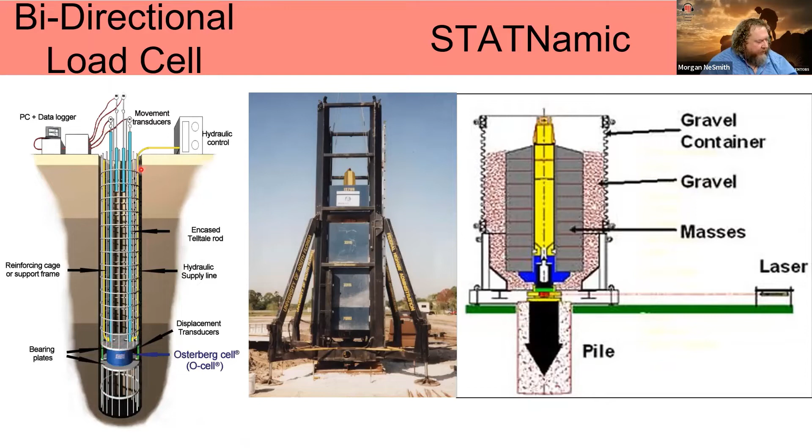Now, the only downside is, since it is happening in both directions, you have to make sure that you have enough shaft resistance to react and get your full toe resistance. If you have very, very short piles, you will start to push this part of the pile out of the ground and not be able to apply the full load to the bottom of the pile. So it's a great system, especially for very high loads that you want to test, but you do need to make sure you have enough resistance in the pile shaft to do it.

So non-destructive testing - after we've actually put the pile in the ground, maybe we've load tested, can we test for the integrity of the pile? Well, the DFI has a guideline specifically for auger cast in place, but you could use it for CFA too, for using non-destructive tests to test integrity. One of our committee members, Bernie Hertlein, has also authored a general book on non-destructive testing. That's a great reference - it contains a lot of the same information, and Bernie participated in the development of this document as well.

But the most common tests we see - one is the low strain pulse echo test. This is the top of a CFA pile, and you can see the hammer that someone has, and they are going to hit the top of that pile. There's also a receiver placed on the pile top, and you measure the acceleration of the wave through the pile, and then the time it takes for that wave to return to the top of the pile.

Again, this method, because it's dynamic, is called a low strain dynamic test. It's great for driven piles. We have to be very careful of using it for CFA piles sometimes, because it's very sensitive to differences in diameter. Because we're not casing these piles, we often have a bit of a difference in diameter. In particular, if you have very soft soils at the top and a wider pile at the top, that comes back to a smaller diameter at the bottom where you have stiffer soils that aren't creating as large a hole, that can cause problems with the reflection and the measured wave speed. So those things need to be taken into consideration. This used to be very common, but it's gotten a little less common because of some of these limitations for CFA piles.

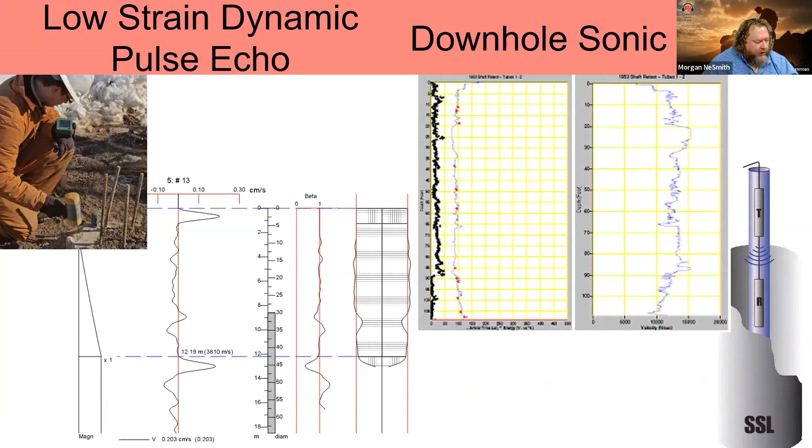Thermal integrity tests are becoming much more prevalent, I think, at least in North America. And these are what they sound like. We measure temperature, and we generally do these by attaching a string that has about 3 to 4 temperature gauges per meter, all the way down the pile.

What you can also do is, within the first 24 hours after you cast the pile, you can put a casing in when you cast the pile, and then within that first 24-hour period, lower a probe down all the way through the pile. This is my preferred method because it measures continuously, and you don't have to pick a time to try to run the test.

Because what you're looking for is the heat of hydration throughout the column of the pile. And what we're really looking for are differences in the heat of hydration. We maybe don't need to worry so much about the top and the bottom, because we either have air on top of our grout column or soil below it. But within the grout column, we just want to make sure that we're not seeing any really sharp decreases in temperature that would correlate to a soil inclusion where we would not have a full column of grout.

Again, it's also not necessarily direct. I mean, the measurement of the temperature is direct, but again, you just want to be aware of the stratigraphy that you're testing in. And because you are measuring temperature directly, it can give you some very nice results in terms of the predicted diameter. If you know how much grout or concrete you placed in the pile, so you know the overall volume of the pile, you can get a good representation of the average diameter of the pile.

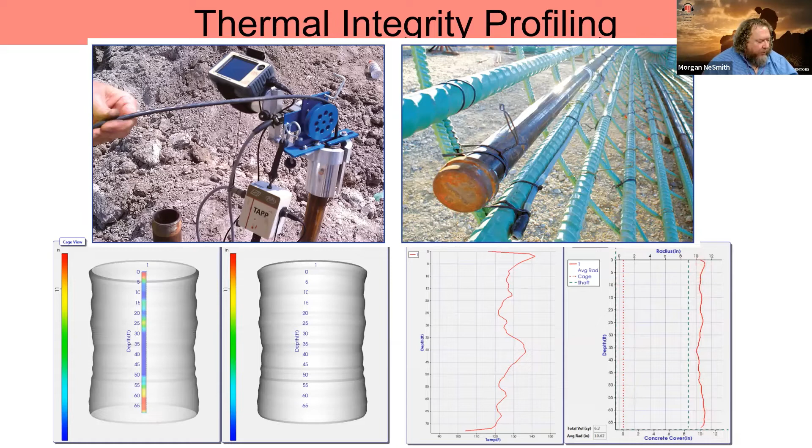Okay, so lateral load tests, I don't really want to get too far into the means and methods. Those are pretty standard, where we have a reaction system of some sort, and we're pushing off of that to apply load to the test pile. And then we're monitoring the movement of the pile head at a couple of different levels, monitoring lateral movement as we apply load to the pile.

What I want to say, though, is we generally, and it's just the nature of what we can test, right? We generally are testing one pile, and it's in a free head condition. And geotechnically, at least in a lot of codes, 1 inch or about 2.5 centimeters of deflection is considered the ultimate load. So whatever load causes that deflection, we then divide by 2.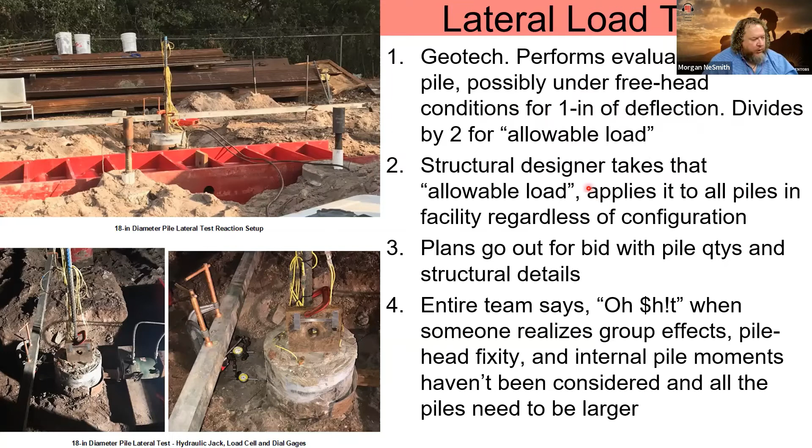But the structural engineer will often take that allowable load and apply it to all the piles. The problem is, if you have a large group of piles, for that one pile you need to account for the design of that group with the reduction of the allowable load of the piles.

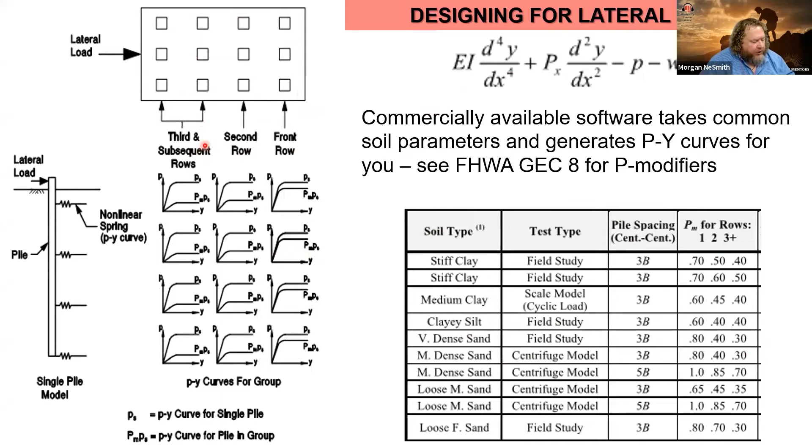And that's really the only thing that I want to point out about that, is we need to be very careful about when we give structural engineers pile capacity, that we're making sure we're telling them it's only for one load or one pile.

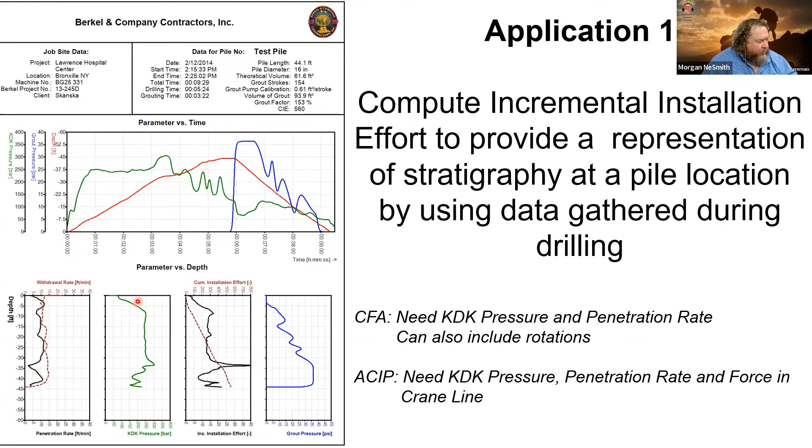So we have penetration rate, withdrawal rate, and fluid pressure, and we can correlate those to tip resistances. If we have a cone tip resistance of a particular soil, and the torque required to advance the tool along with the penetration rate, you can estimate the effort required to advance the tool, which looks a lot like tip resistance. You can watch that in real time to make sure you're getting into the appropriate stratigraphy if you have boring or CPT data available.

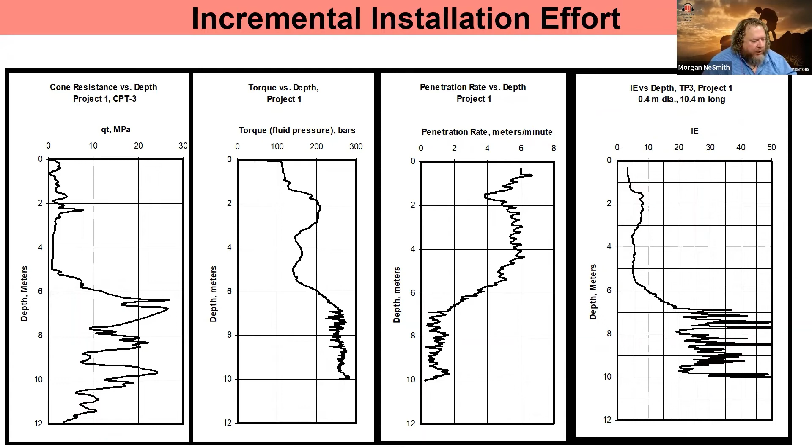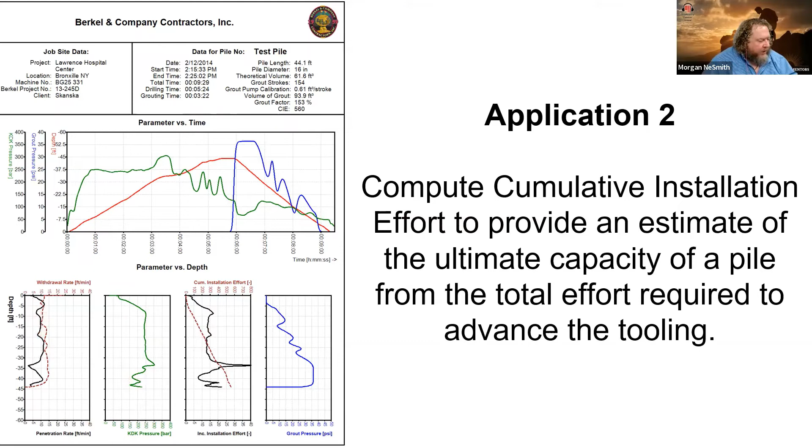These are parameters you can watch both as the operator or inspector in real time as the piles are being cast. One thing being worked on now is called monitoring while drilling. It's taking these parameters, torque and penetration rate, and estimating the capacity of the pile.

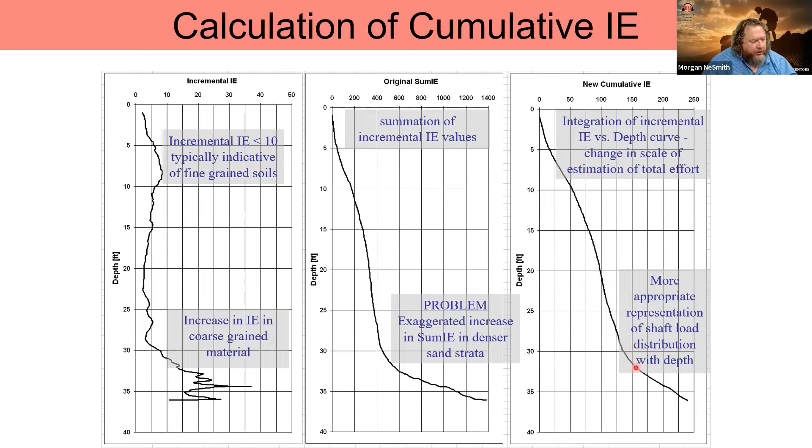We have this original incremental installation effort that's directly related to torque and inversely proportional to penetration rate. But if we take the cumulative integration of this curve versus depth, we can get a relatively accurate representation of the total energy required. It's like measuring pile driving - the amount of energy required to drive a pile is often correlated to capacity. We're starting to do the same thing, taking the amount of energy required to install the pile, and this final value can be related to pile capacity.

So that's that. I've got some additional slides, but those are for another time. Those are really the items I wanted to cover today. I appreciate your patience - I know I went a little bit over.